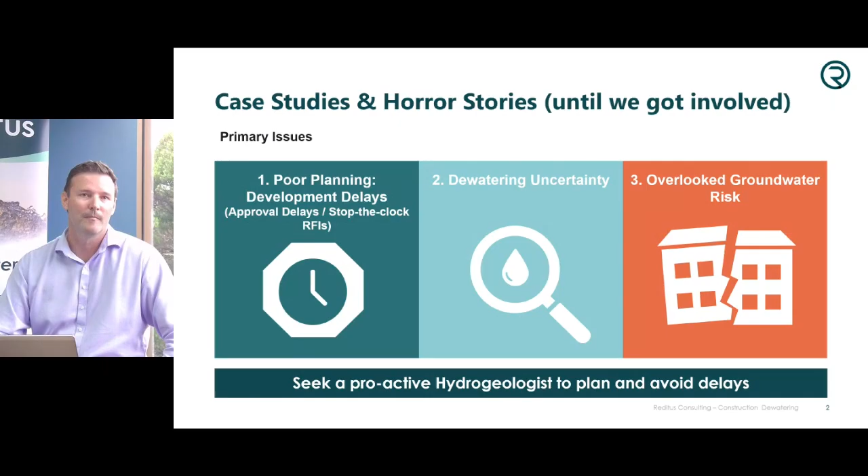So let's start with examples of poor planning. I kid you not, I've had sites on airports, massive council projects laying kilometres of pipelines. I've had tier 1 and tier 2 developers come to me with civil contractors engaged on site, waiting to dig. However, no one's considered getting the approval. When I talk to them and explain how long this takes, they fall off their chair and cannot believe the process and how disruptive this becomes to their development program.

So Steve's going to expand more on this today based on the New South Wales perspective.

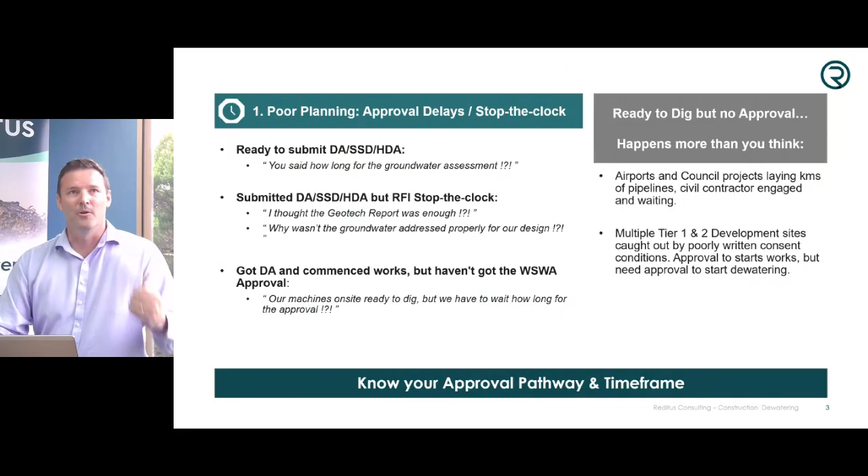The next issue revolves around not adequately understanding the development constructability with the actual groundwater conditions. I've got so many examples where the development design has been based on over-predicted groundwater inflows or non-existent hydrostatic pressures. We've come onto projects where the building design has not been based on the actual hydrogeology of the site, and we've managed to come in with savings in the developments of between $1 and $50 million, depending on your scale.

So there's a lot of value lost in oversizing dewatering equipment, oversizing water treatment plants, over-engineering structural features, and this compounds blowing out project timelines.

Just a quick example in Monterey, down in the Botany Sands, the developer had a preliminary geotech report predicting 1.5 gigalitres of inflow, and this was contaminated with PFAS. They were getting quotes in excess of $900,000 for the treatment cost alone, but we managed to come in, taking a look at the groundwater from a hydrogeological perspective, and managed to save significant money on their program, like over $600,000, and reduce the time frame.

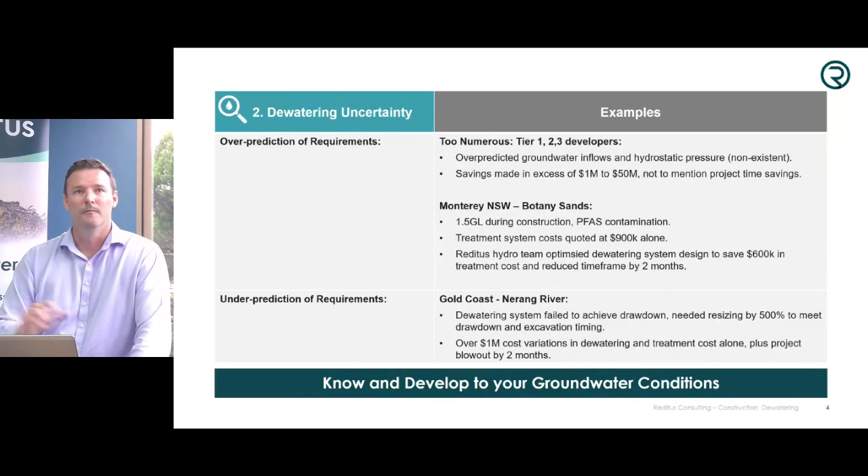And then finally, there's the development sites where major failures have occurred, where groundwater risks have not been understood or managed appropriately. You're probably all aware of the Mascot Towers incident and the damage done through neglect of important dewatering issues, structural failure of a neighbouring site: 131 units uninhabitable, $15 million in damages, legal fees, and not to mention reputational damage.

I've had similar issues in Double Bay, where heritage buildings have suffered differential settlement due to poor management of groundwater drawdown.

I've also had sites, one in Double Bay, where the approved development had significant dewatering requirements. They'd gone through approval, done their design, spent a lot of money, but when it came to constructing it, the whole project became financially unviable and the developer ended up walking away. What a waste. I wish they'd come to me sooner and I could have advised them on how to deal with the dewatering issues. So don't make high cost decisions on poor groundwater information.

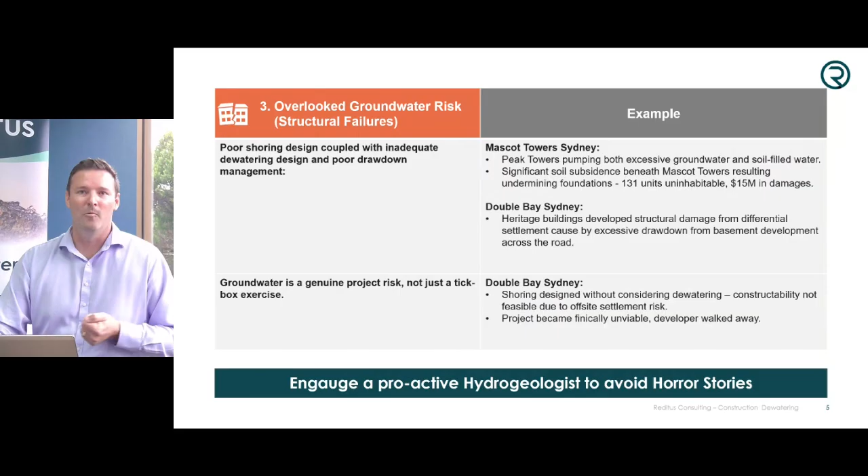I'll now hand over to Steve and he can walk through the specific New South Wales approval process.

Well, thank you, Lee, and thanks, Alex, too, for allowing Dincel to undertake this presentation today on the design and approval of developments that impact the aquifer in New South Wales. The situation we're in at the moment is we've got increased densification leading to an increase in basement excavation. In many areas the water table is relatively close to the surface, and the design of basements needs to take into account impacting the aquifer both during construction and also post construction.

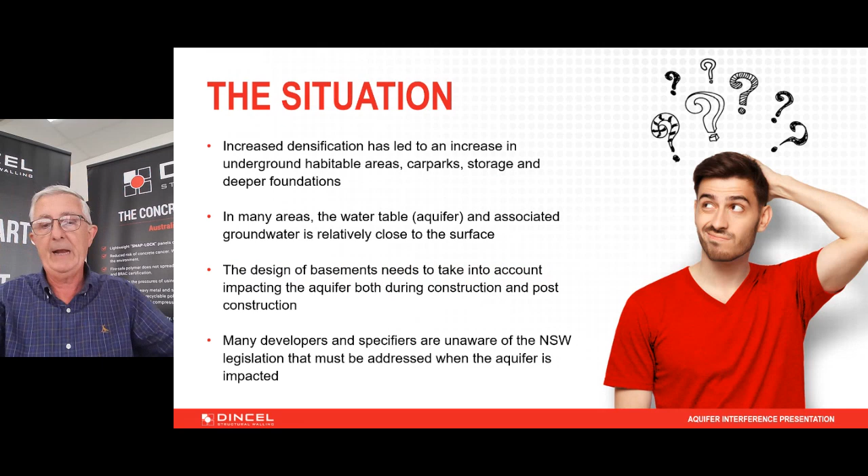We've found that many developers and specifiers are unaware of the New South Wales legislation that must be addressed when the aquifer is impacted. In pulling together this presentation, we've engaged with pretty much all councils in the Greater Sydney region, with hydrogeologists and with architects. Particularly we engaged with Water New South Wales, and the information I'm about to present has been reviewed by and had input from Water New South Wales.

Now, there are four major pieces of legislation or documentation that impact construction in New South Wales. There's the Water Management Act, water sharing plans, the New South Wales aquifer interference policy, and the minimum requirements for building groundwater investigation. Suffice to say, the legislation is quite complex and convoluted.

The minimum requirements document is a guide to assist developers in the legislation. Critically, it states that the best practice is engineered drainage around and under a tanked basement. Further, to Lee's point, the site hydrogeology report in support of the application must be technically robust and comply with all aspects of the legislation.

The application must demonstrate that there is no more than minimal harm as a result of any activity, and if that can't be proven, then it won't be supported. Aquifer interference activities must be licensed to take into account the water taken, and must have approval and be designed to manage to ensure that there's no impact.

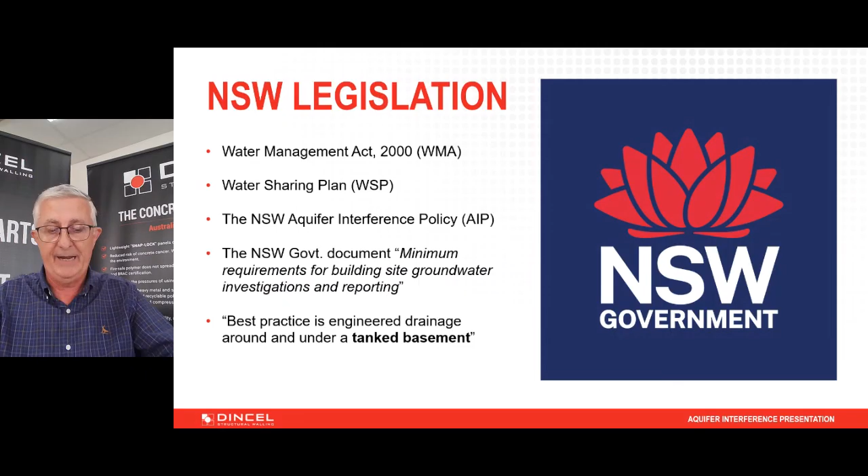Also, of course, other requirements that need to be taken into account: developers need to understand the specific basement design requirements of some councils. There are a number of councils in New South Wales that require a tanked basement when the water table is impacted. Indeed, there's one council that requires a tanked basement if you're just going to be digging a basement.

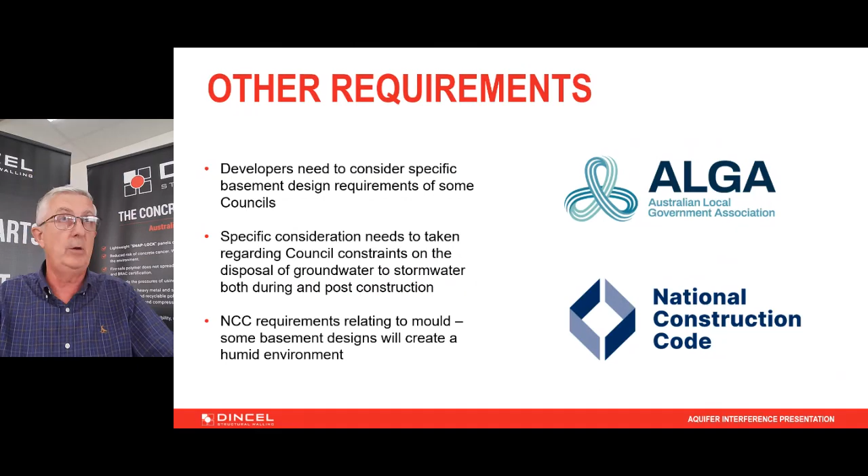And specific consideration needs to be taken into account in terms of council constraints on the disposal of groundwater to stormwater, both during construction and post-construction. And critically, we need to take into account the NCC requirements relating to mould, because certainly some basement designs will create a humid environment which could lead to mould.

Now, the process overview. There's a two-stage process within New South Wales. Stage one, proponents should have the proposal reviewed by Water New South Wales and the New South Wales Department of Climate Change, Energy, the Environment and Water via the integrated development process. The review at this stage is to ensure that the development complies with all aspects of the legislation before DA, and will avoid any of those costs further down the track that Lee alluded to.

Now, referral at this stage isn't mandated. However, no referral at this stage could, and in many cases does, lead to problems and delays down the track. Water New South Wales actually advises councils that whether or not developers have taken the integrated development process, they should still review it.

Stage 2, and prior to the commencement of works, the proponent must apply for and be granted a water supply work approval, and works cannot commence without a water supply work approval. If the project wasn't assessed previously, it's going to be assessed at this point in time, and the project will be assessed in exactly the same way as stage 1, prior to a water supply work approval being granted.

So a range of conditions will be applied at this point in time, potentially unforeseen, and it will certainly delay construction as a minimum and could indeed require the project to be redesigned. In effect, there's a third and relatively complex stage that a drained basement needs to undertake, and I'll cover this a little bit later. Now, it's worthwhile pointing out that each of stage 1 and 2 assessments can take anywhere from a few weeks to many, many months, depending on the complexity of the hydrological assessment needing to be undertaken.

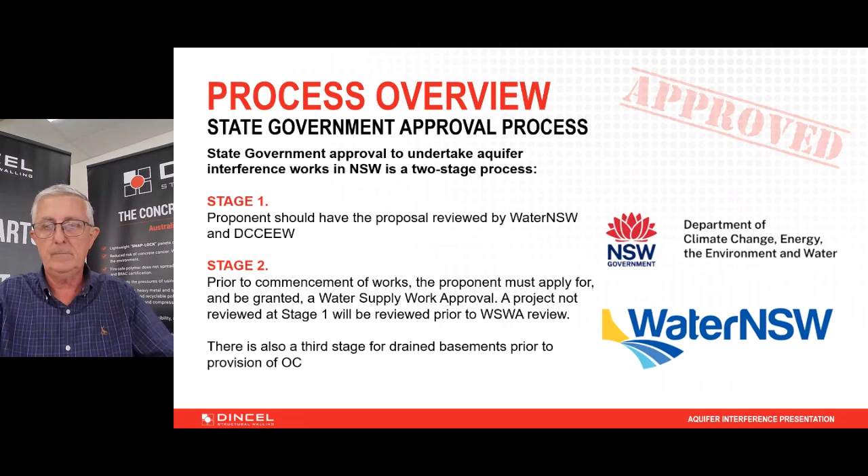Now, if I could just make a point about the post-DA stage water supply work approvals. These three points come from an actual presentation from Water New South Wales from September 2025. In summary, the three points are: it is the proponent's responsibility to get a water supply work approval prior to construction, and without one, work is illegal.

And also, a water supply work approval will not be granted if the basement design does not conform with the council requirements, and if the council approval for the water disposal is not part of the application.

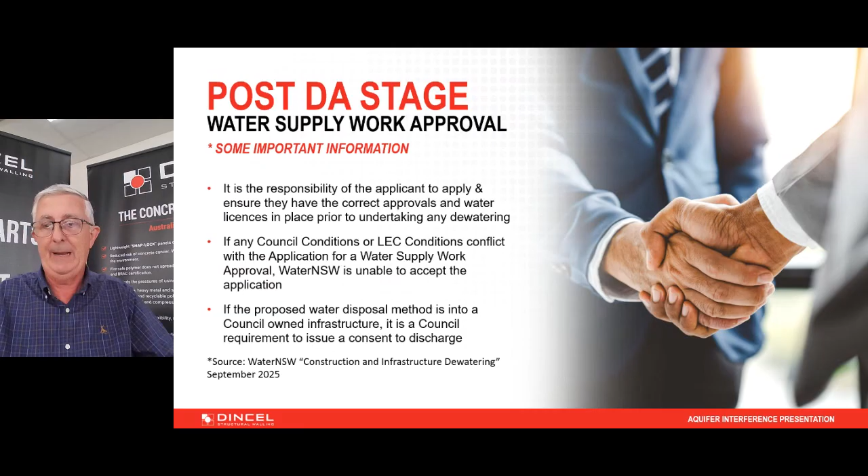Now, there are two different sorts of basement designs that you can move forward with: a tanked basement and a drained basement, and both of them have different approval processes. Under a tanked basement, only a during-construction water management plan will be required. A tanked basement is only going to have standard general terms applied for construction, and then there will be no conditions applied post-construction by Water New South Wales.

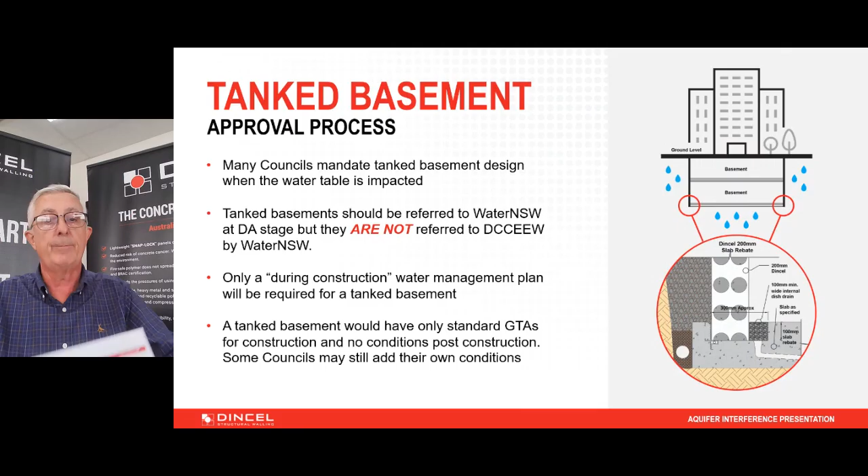Standard GTAs include simple issues such as stating that the water take must be recorded, council requirements must be met, all licenses and agreements must be granted before construction, and so on. Tank basements critically are not referred to DCCEEW by Water New South Wales at DA stage, as there is no aquifer impact post-construction and hence no need for complex hydrological analysis. This makes the process a quick and simple one.

For a tank basement, prior to work commencing, developers must apply to Water New South Wales for a water supply work approval, and the approval must be granted before construction commences. Most tank basements are deemed low risk and therefore are not submitted to DCCEEW for review at this point in time. That makes approval relatively quick, and further, there is no requirement for post-construction conditions.

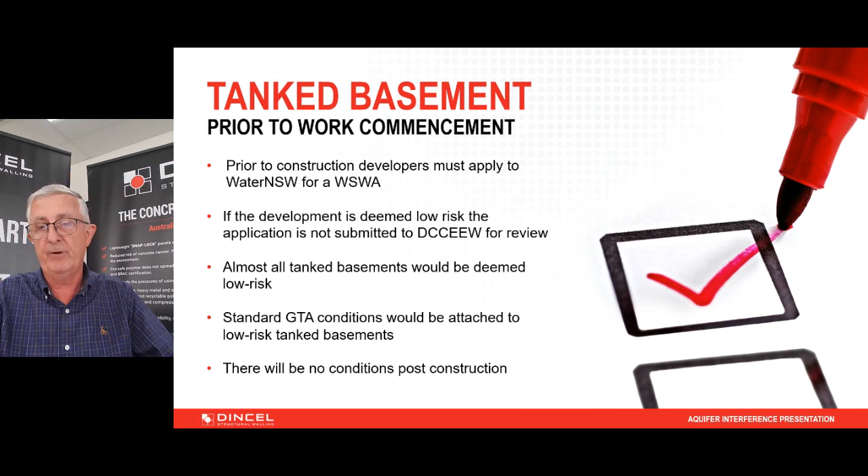A drain basement is somewhat more complex. Drain basement applications have to prove to the satisfaction of Water New South Wales and DCCEEW that the project will have no more than minimal impact on the aquifer, or they will be refused. Understand, all drain basement applications will be referred to DCCEEW.

Drain basement applications must not only have a detailed during-construction water management plan, but they must also have a detailed and documented management plan for the life of the building. It is documented in the guidelines that this is 100 years.

DCCEEW and Water New South Wales will also include various conditions depending on the project, together with the GTAs. In particular, it will require the water take to be recorded annually and reported for the life of the building, and it may be required that aspects related to maintaining and draining the basement are also reported.

Assessment will, in all probability, be lengthy due to the complexity of the hydrological assessment. It should be noted too that drain basements will, in all probability, create a humid environment, which could promote the growth of mould, and this would be, in many cases, in contravention of the NCC. This indeed could be a far more pertinent issue than all the requirements regarding conforming to the appropriate legislation.

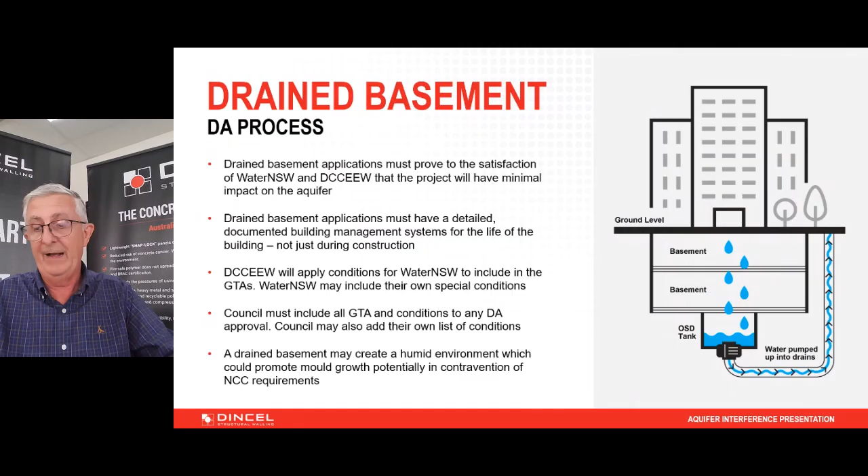A fully tanked basement will not create a humid environment and as such would not fall foul of any NCC requirements.

Prior to and post-construction: prior to construction, developers must apply to Water New South Wales for a water supply work approval, as with tanked basements. But in addition to Water New South Wales, they will also be referred to DCCEEW, and that's going to take a significantly greater period of time than for a tanked basement.

The third approval stage that I alluded to previously is that post-construction, and prior to OC, the developer must resubmit for review and approval the post-construction water management plan.

Water New South Wales and DCCEEW, at this stage, reviewing the management plan, may approve the plan, could approve the plan with additional conditions and requirements, or potentially could reject the plan and require modifications and resubmission. Again, this process is going to be potentially lengthy and problematic.

Then, prior to OC, if the development is going to take more than 3 megalitres per annum, the developer must apply for and receive a water extraction licence to take water for the life of the project. OC will only be given once there's a fully approved life-of-project water management plan.

If at any time during the life of the project the water take exceeds the approved water take, the project must be resubmitted to Water New South Wales and DCCEEW for reassessment. This could lead to potentially significant remediation works to be undertaken by the ultimate owner.

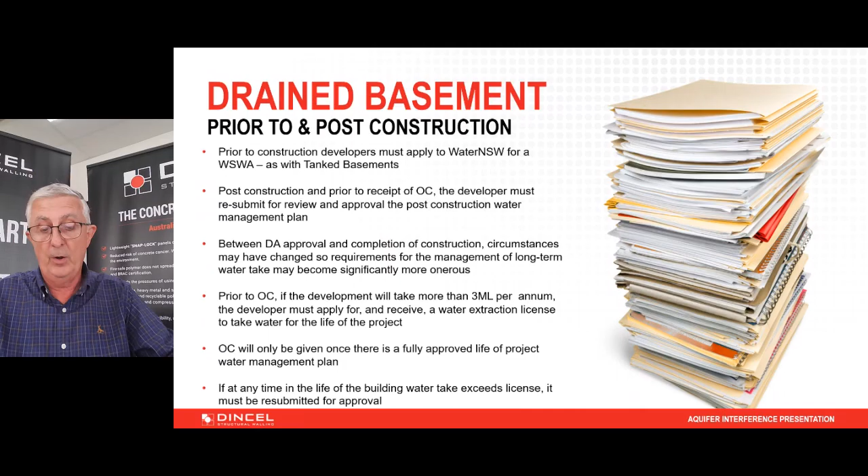Now, water take during construction. Recently, legislation has been changed such that in Metro Sydney, water take during construction is unlimited. In other locations, you still have to follow the process previously described.

Projects still need to be reviewed by Water New South Wales. The assessment process by Water New South Wales will be exactly as previously described, depending on whether it's a tanked basement or a drained basement.

Particularly, this will include a during-construction water management plan with particular emphasis on the environmental impact of, and disposal of, large water takes. During construction, there's no need for a water access licence, but there will still need to...

...be a water supply works approval from Water New South Wales and DCCEEW. It should be noted that records of water must still be kept, and council must still approve the disposal to stormwater if this is the proposed disposal method.

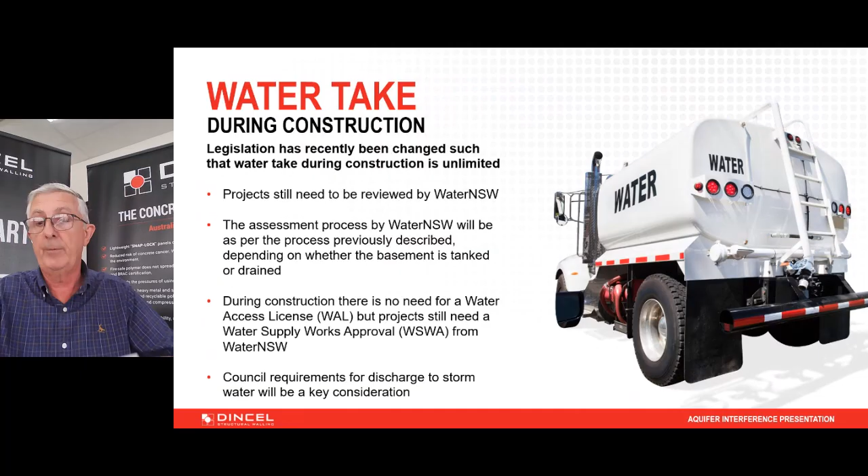Now, water take less than 3 megalitres per annum post-construction. Drain basements that take less than 3 megalitres per annum are treated slightly differently. They still need to be referred to Water New South Wales. Assessment by Water New South Wales will be relatively quick.

There is no need for a water extraction licence. Councils must still approve and apply conditions to disposal to stormwater. And of course, I just need to re-emphasise that disposal to sewerage is illegal.

All issues relating to a drain basement still remain. Water management plans post-construction must be submitted and approved prior to receipt of OC.

The building owner is responsible for recording and reporting water take, and the building owner is responsible for maintaining drain basement infrastructure. And of course, if at any time for the life of the project, post-construction water take exceeds 3 megalitres, the project must be resubmitted to Water New South Wales for reassessment.

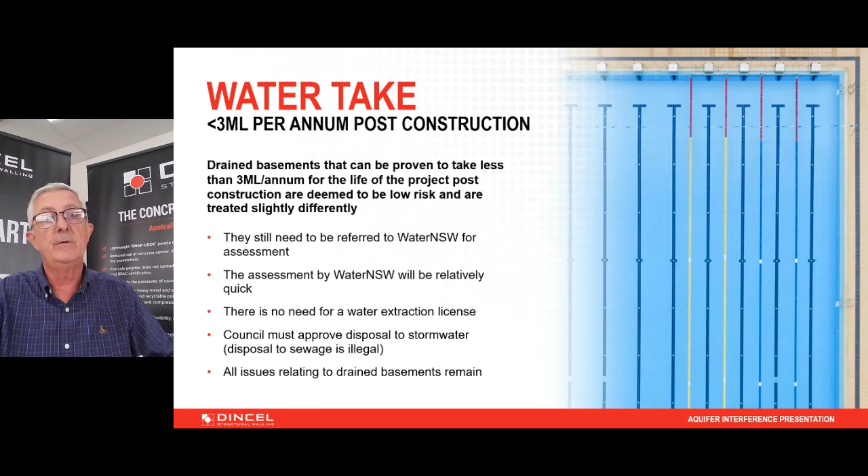So in summary, any project that impacts the aquifer, for the life of the project, must be assessed by Water NSW and DPI to ensure minimal impact. The approval process is two-stage: assessment of the impact for application of GTAs and conditions, and the granting of a water supply work approval.

All projects must have a during-construction management plan, but in addition, drained basements must have a comprehensive post-construction water management plan for the life of the project, and an OC cannot be granted unless the plan has been approved.

So ergo, the best course of action, in our view, is a tanked basement. A tanked basement has minimal impact on the aquifer and as such meets all requirements of Water NSW legislation. It's the preferred construction methodology of Water NSW and DPI. In almost all cases, it will only be assessed by Water NSW, will only have standard GTAs during construction, and will have no GTAs post-construction. The approval process will be quick and simple.

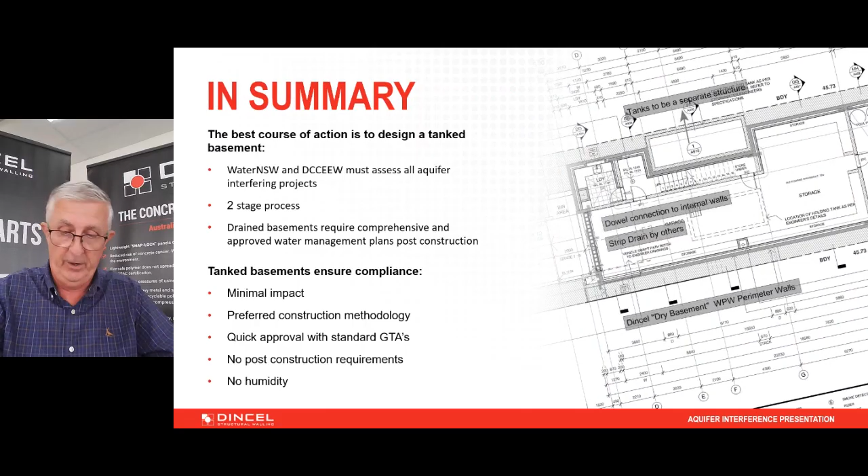It aligns with the design requirements of many councils within Sydney. It requires no ongoing recording of water take or maintenance cost. And critically, it will not create a humid environment and as such will not promote the growth of mould.

For those listening from Victoria and Queensland, I'm no expert in this area, but I can offer the following observations. In Victoria, only one council mandates that basements be tanked, and that's the City of Kingston. Most councils do not allow discharge to stormwater during construction. Disposal to sewer via a trade waste agreement and/or off-site disposal or approved on-site reuse are the preferred methods.

Post-construction, no discharge to sewer or stormwater is allowed. There must be on-site reuse and/or off-site disposal. This poses significant long-term cost risk. The best option, therefore, would be a tanked basement.

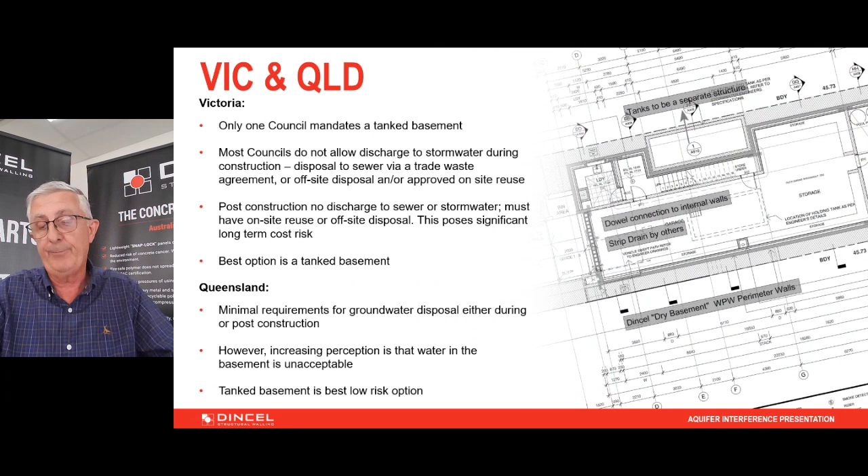In Queensland, there are minimal requirements for groundwater disposal either during or post-construction. However, there's an increasing perception that water in the basement is unacceptable. So a tanked basement, again, is the best low-risk option.

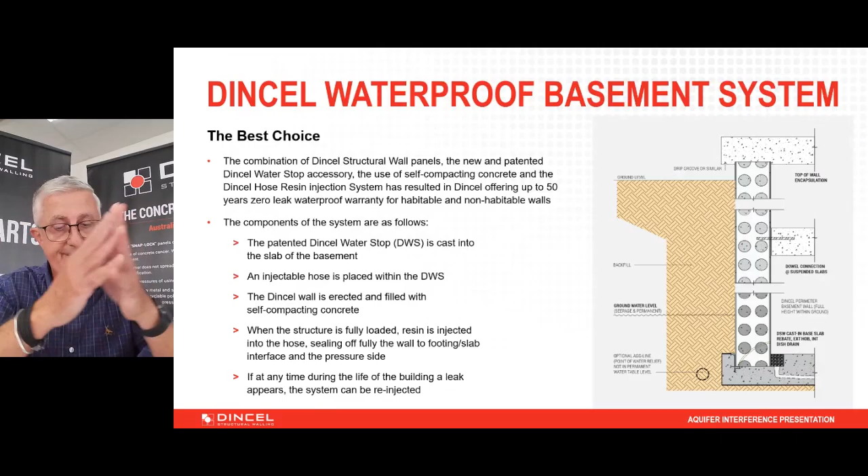Now, Dincel provide a waterproof basement system that is low cost and fully warranted for 50 years. The components of the system are a patented Dincel water stop that is cast into the basement slab. The protective cover is removed from the DWS and an injectable hose is placed within it. The Dincel wall is erected and filled with self-compacting concrete.

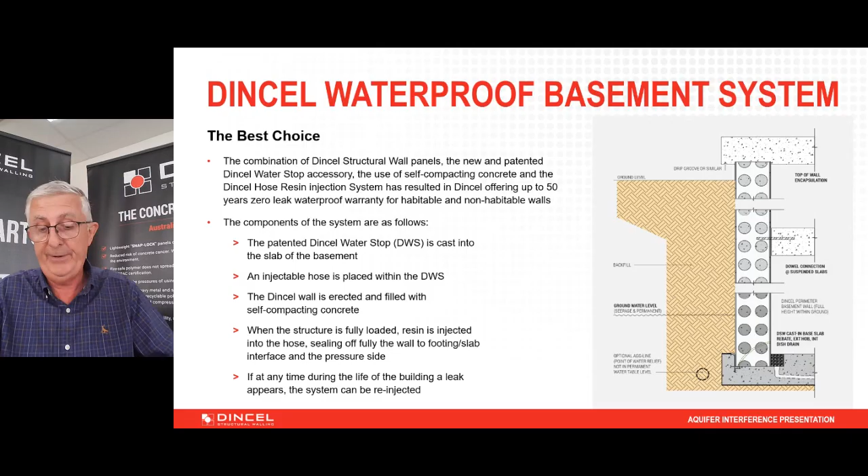When the structure is fully loaded, resin is injected into the hose, sealing off the wall to the footing slab interface and the pressure side. If at any time during the life of the building a leak happens to appear, the system can be re-injected and the leak sealed.

Dincel has had an independent quantity surveyor undertake a cost comparison of the Dincel system against conventional tanking systems. Most pertinent for this topic is the analysis found in submerged conditions. It found that the Dincel system is 17% cheaper in sandy soil and 28% cheaper in stiff clay, hard shale and sandstone.

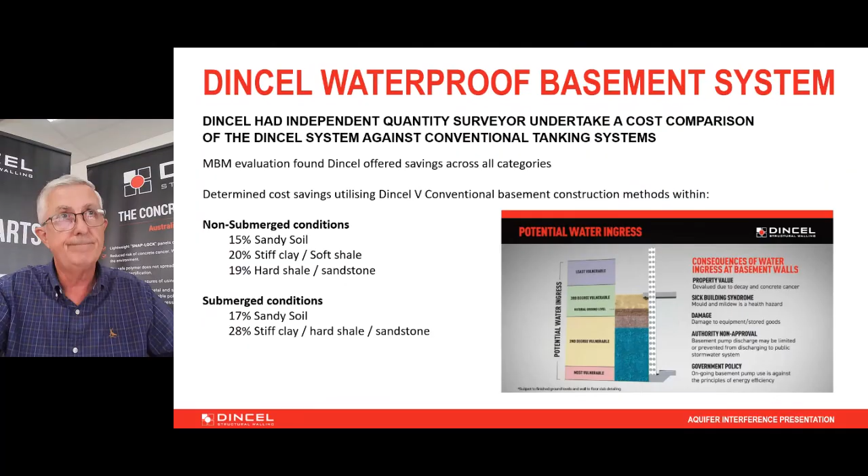So finally, the Dincel waterproof basement is the best choice, and a tanked basement is the best choice. Dincel provides the best, lowest cost option for a tanked basement. We provide up to a 50-year leak-free warranty.

Only one entity is responsible for the waterproofing integrity of the basement, as opposed to conventional waterproofing where three parties - the product supplier, the product installer and the builder - will argue against individual responsibility should a leak eventuate.

If for some reason there is a leak, it can be repaired from the inside of the basement with minimal, if any, impact on the building occupants by simply re-injecting at the point of leakage. Water is stopped at the pressure face, both initially and at the time of any repair, ensuring a fully dry wall and as such, zero possibility of mould growth.

I have gone through this detail relatively quickly, so I look forward to listening to and answering your questions. Thank you.

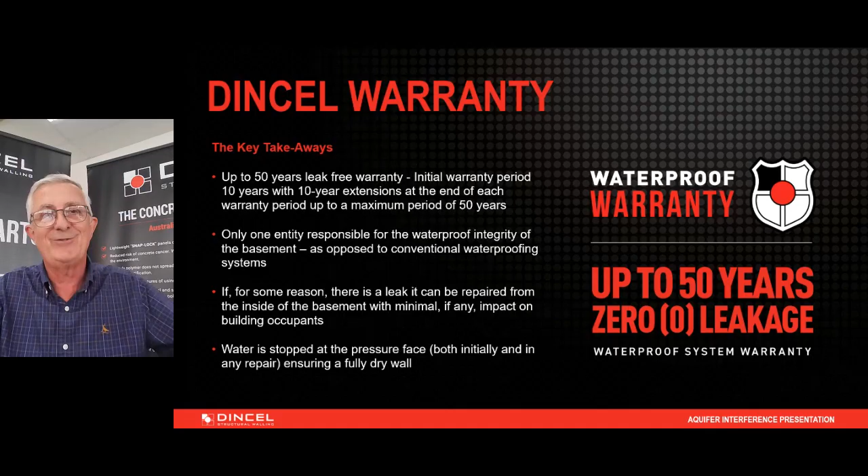Thank you so much, and a really valuable conversation. I've got some projects on at the moment where these are considerations that you really start to feel the pressure of once you're well into the project, and that's where I kind of want to start, because a lot of developers really sit at the front end and aren't necessarily thinking about whether their basement solution is tanked or drained.

And so I really want to start at that early phase. It's a question to both of you, Steve and Lee. What advice or recommendations do you have, practically, for developers at the front end of a project when they're contracting the land to consider this? How can you practically recommend for this to be on their mind? And what can they do in the very early phases to get some comfort over which solution is the right solution?

As a hydrogeologist, I'd strongly recommend that any developer engage someone who specializes in groundwater, not just the geotech. They overlap, but they're specialized disciplines. Getting a hydrogeologist involved in the feasibility and due diligence phase of your conceptual planning means we can provide advice on likely inflows, constructability of the development, and cost implications for how you want to construct it. There are potential big savings and cost avoidances that can be achieved if you do it correctly.